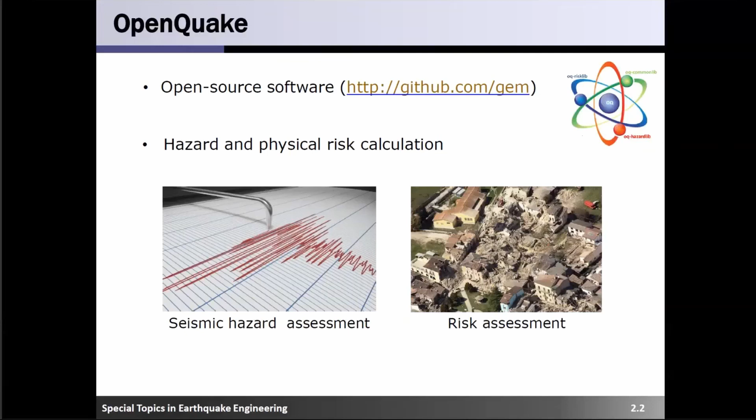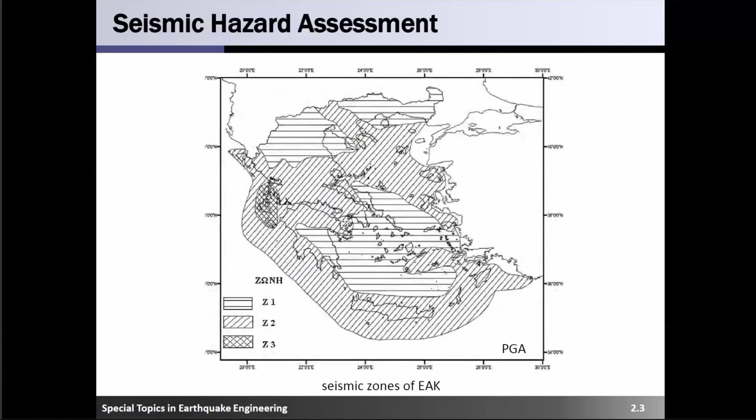Well, seismic hazard assessment does the same for us, but a little better, I think. Those are the outputs we expect from our analysis. When we perform a seismic hazard assessment, the output may be a seismic hazard map. On a map like this, at every point, we can know the value, the ground motion parameter that we want.

In this case, this is a map that shows peak ground acceleration at every point with a specific probability of exceedance in a given time span. For example, we have here peak ground acceleration with 10% probability of exceedance in 50 years.

The next thing we can have, if we don't want a map, is some hazard spectra. A hazard spectrum gives us the spectral acceleration values for a range of periods given a constant probability of exceedance. With the red color, we can see the uniform hazard spectrum we produced from OpenQuake, and the other two spectra are from Eurocode. We know that the black one is for zone 1 and the blue one is for zone 2.

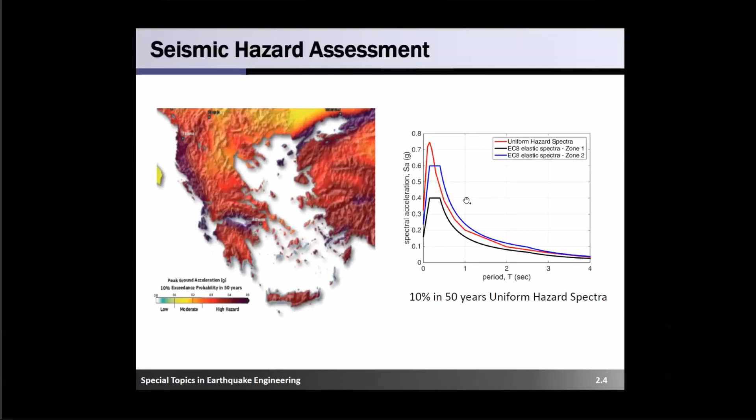You know what spectra is, you have used them, but you can see that those results are not exactly like Eurocodes. That's why we prefer them, in order to have not better results, but more precise, I would say.

When we want to design a structure, we need a finite element model. Now that we want to assess the seismic hazard on a region, don't we want something like that? Of course we do. We need a model that gives us all the details for the seismic sources we will have in the area that we will study.

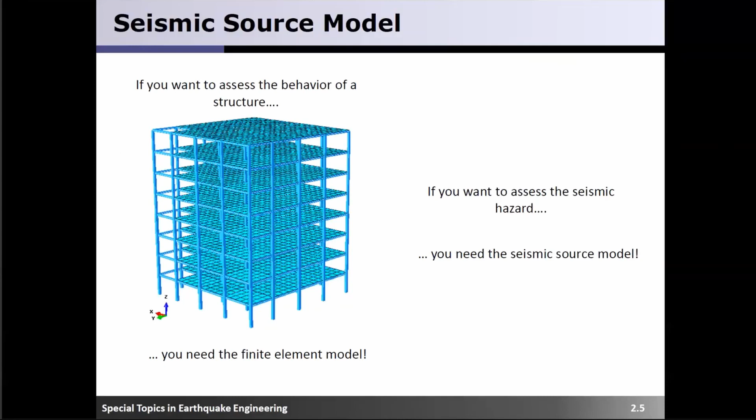In order to simulate the seismicity, we use the seismic source model. We have two options. First, the easiest one is to use seismicity on faults, but this is not easy since not all faults are known. We don't know all the details for all the faults that exist. In this case, if we do know, we can use this option and say that an earthquake is produced by a well-defined fault and a well-defined rupture.

I'm stopping here. Am I too fast? Do you follow me? Do you have any questions? We're following, it's fine. Yes, we follow. Thank you.

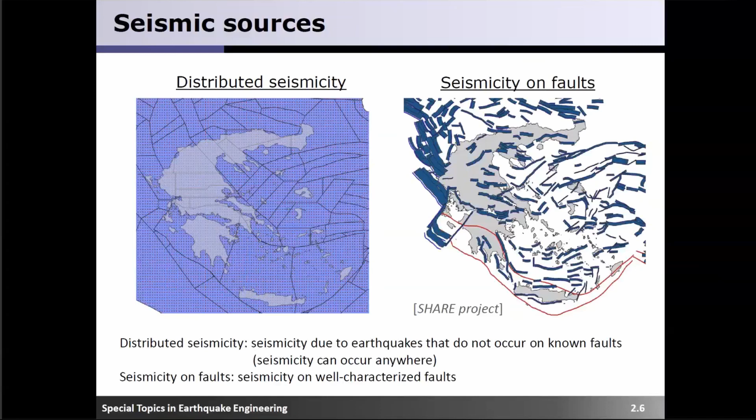As we said, if we don't have a specific fault, we have another option. In this case, we use distributed seismicity. In distributed seismicity, we say that earthquakes can happen everywhere, anywhere, here, there, with the same probability of exceedance. We don't know where, but we know that every point has the same probability of exceedance. So if we choose this kind of seismicity, we can perform the analysis.

We have three options. The first option in this category is to use a point source. A point source considers that the rupture — here we don't have faults, we have ruptures where earthquakes are produced — is generated under a single point that we can see. It is simulated by a planar surface representing the rupture.

Of course, we can also use a grid source, which is a collection of point sources. We won't have only one point source, we can have more. There is a final option where we consider that at every point a rupture may happen. From a computation point of view, those two options — area and grid sources — are the same, because we have to provide OpenQuake a list of point sources where the rupture will be.

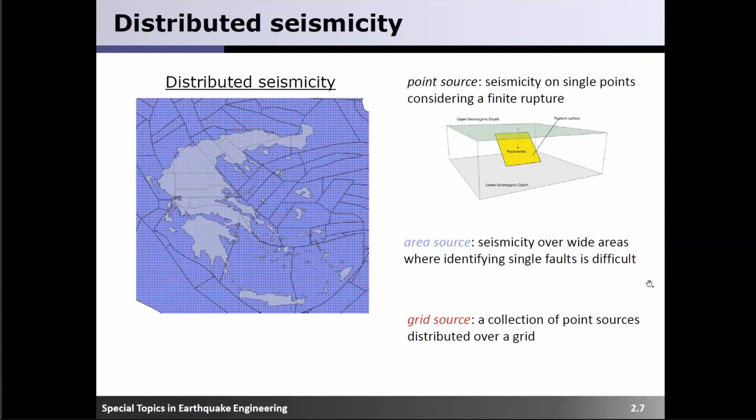Now let's move on to seismicity on faults. We said that here we have a specific fault. How can we simulate it? First, we can use a simple fault. A simple fault is generated by the projection of the fault trace over depth. The fault trace is the intersection between the fault and the surface of the Earth.

It is simple — just a line, or a polyline I would say, that we project over depth. This is what we will use today in one of the examples in OpenQuake. Of course, we can use a more complex fault. In this case, we have a surface that changes width and inclination, values that are not constant. Finally, we have a third option where the fault is simulated by a set of planar surfaces, and this represents the whole fault.

Do you have any questions? Something that you don't understand that you would like to ask? I'm not sure I understood the difference between a simple fault and a complex fault.

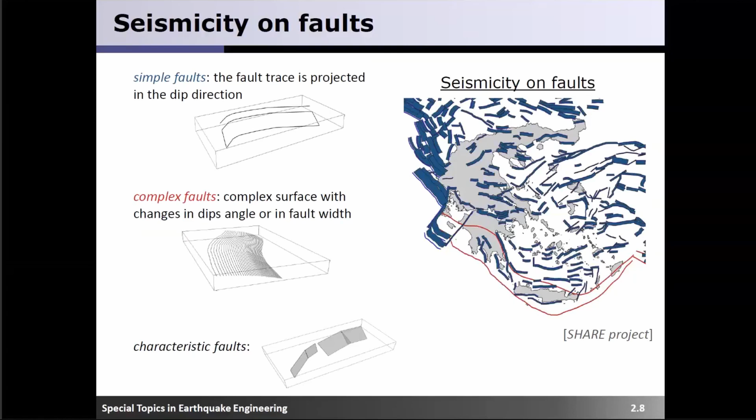Here we will see how we can simulate a point source. A point source is used for distributed seismicity, remember that. So we have a rupture, and our rupture is a rectangular surface.

For that, we have to specify the inclination, exactly what Mr. Vamvatsikos told us. So I have the inclination of the rupture plane, and I also have the orientation of the fault. The inclination is the angle between a horizontal plane and my rupture. We can see some examples here, a 0-degree angle, a 90-degree angle, and many more.

Finally, we have to specify the depth of the hypocenter. We said that this is a source where it is generated under a single point, and that point is the hypocenter.

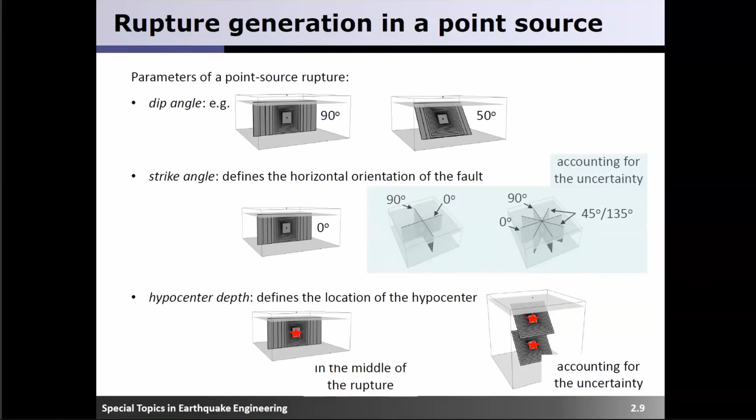So I have an area distributed source in this case, and we said that earthquakes can occur anywhere with equal probability. We saw what the point source is on the previous slide, and we also said that we have to give as an input a list of point sources where our area will be.

I have a question regarding the area source. You mentioned that the earthquake could happen anywhere in the area. So for the area source, do we assume that all the earthquakes that could occur would be point sources, or is there the potential that there would be like a simple fault, like an earthquake with a fault also? So the question is, if we have an area source, could an earthquake on a simple fault happen there? Can we have both cases, a simple fault and a grid source?

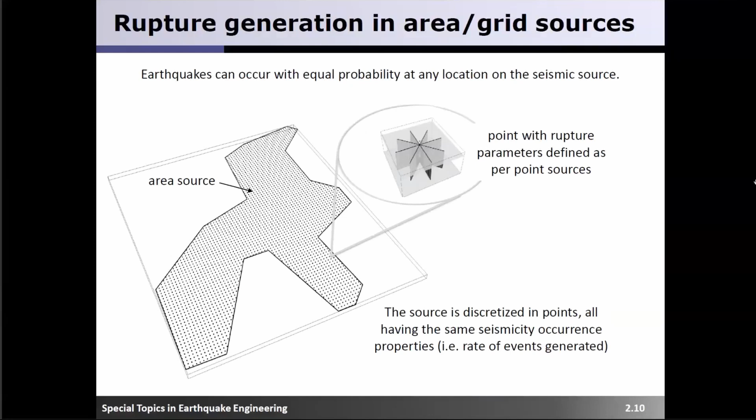Okay, let's move on. I think we stopped over here. Now that we have specified our seismic source model, we know what our sources are, but we don't know what the magnitudes of the earthquakes that will happen are.

Each seismic source is associated with a model that gives us the distribution of earthquake magnitudes. So for each source, even if this is a simple fault or an area source, at every point I know that I have a distribution for magnitudes. So for a given magnitude, I know the probability of occurrence. If I want to use a nice recurrence law, it's Gutenberg-Richter's. So I have a source, and for that source I have a distribution that shows me, for each magnitude, the probability of occurrence. Okay, so far? This is not something difficult.

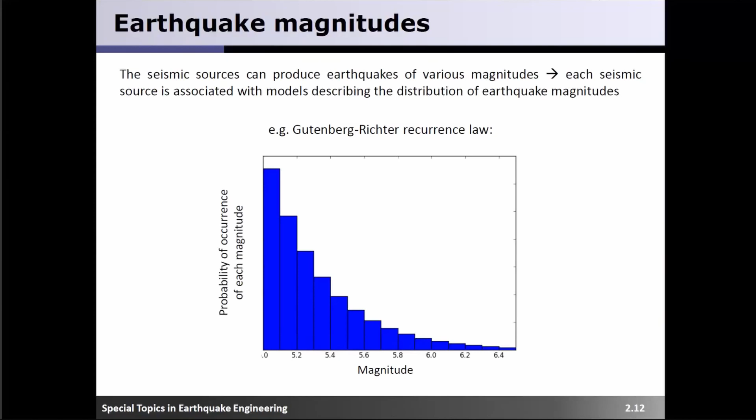Of course, even if this source is a simple fault or a point source, its rupture is associated with the earthquake magnitude. The higher the area of the rupture, the higher the magnitude of the earthquake. You understand that? If this is a bigger rupture of the fault, this will be more devastating.

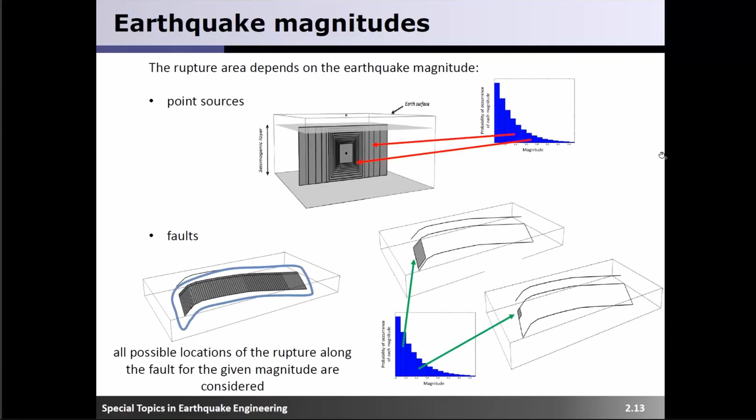Okay. Let's see something else. We said that we have our sources. Are we 100% sure that we have only one type of sources? No, we are not. If we want to consider all the cases for our seismic sources, we have to use a logic tree. This tree is something like that—it helps us consider all the epistemic uncertainties of our model.

So I have a simple fault. Does this fault have a specified dip angle of 50 degrees? Sometimes I'm not sure about that. So I will use a logic tree in order to take into account all these cases.

Do I have only a single seismic source? Even if I do have a single seismic source, and this could be a single fault, does this fault have a specified dip angle, or is the hypocenter exactly one point with specified coordinates? All those uncertainties are concentrated on a logic tree and help me take them into account. Any questions for that?

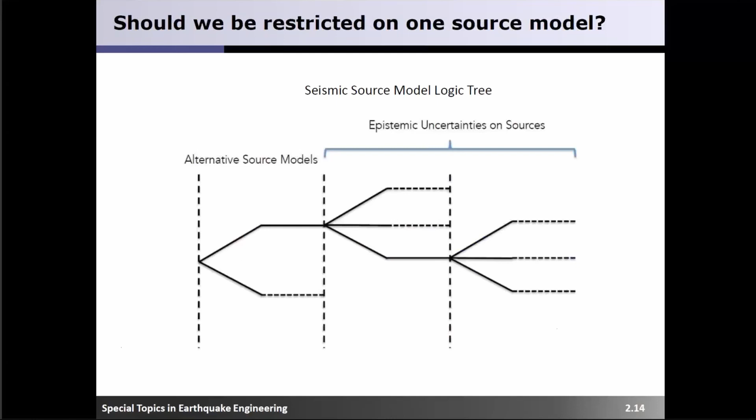So now that I know my seismic sources, I know where they are. If I have a site that I want to predict the future shaking, and I know the sources in that site, I know the distances between my rupture and the site that I want to study. Also, we know that each seismic source is associated with a distribution that gives me the magnitudes. So I have the magnitude and the distance.

We are engineers, and when we want to design a structure, we don't use values like the magnitude and the distance directly. We want parameters that are associated with the ground motion. That's exactly what a ground motion prediction equation does. We give it as inputs some characteristics of the earthquake, like its magnitude and the distance from our site, and it gives us a ground motion parameter. Cornell's equation can give us back the natural logarithm of that ground motion parameter.

In this case, this is PGA. So I have as inputs the magnitude and the distance, and the output is a ground motion parameter. But this is the mean value of that parameter. So I have an earthquake, let's say with magnitude 5. This graph is for magnitude 5 earthquakes. And at a distance of 10 kilometers, using Cornell's equation, I find that the ln PGA has that value.

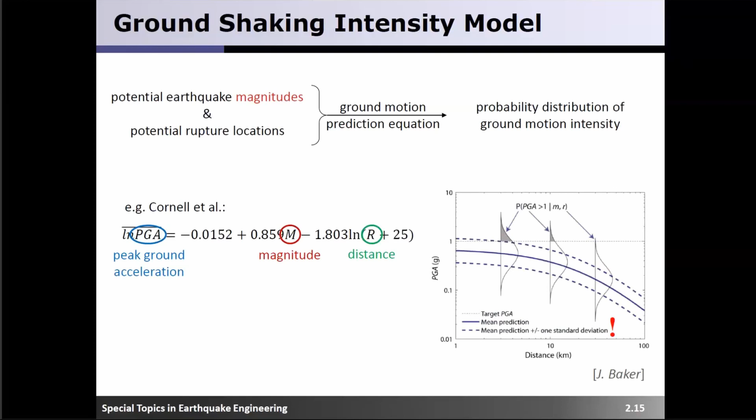So far we used logic trees only to take into consideration the epistemic uncertainties of our seismic source model. We can also use logic trees to take into account all the possible ground motion prediction equations. Is it okay to use only one ground motion equation? We're not sure. We may want to use two, three, or more. That's why we use a logic tree.

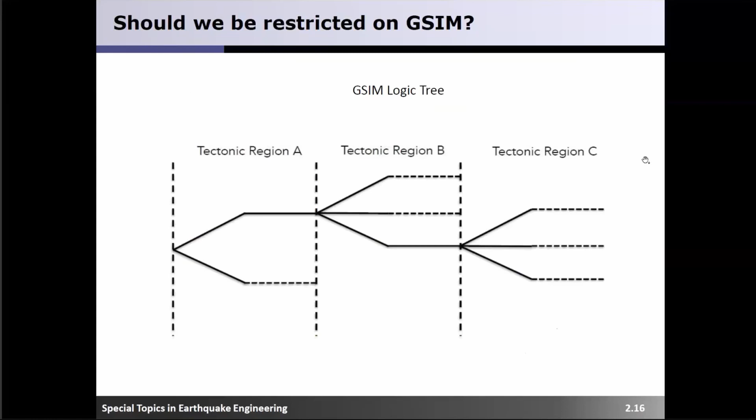Here's an example. We have our seismic source—this is a logic tree, we'll use that too. We have a seismic source, and we consider this is a fault. We're not sure about the dip angle, so we'll perform the analysis considering three possible dip angles.

For each angle, we'll also use two ground motion prediction equations. Each branch—those are called branches—is associated with a weight factor, so whatever I use is associated with a weight factor in order to produce my final output. I think this is the last one.

Do you have any questions here? Guys, let me come back a little bit and give you some pointers to understand what's going on. It's all about correctly assembling the pieces, the discrete pieces, going to the end.

There are two pieces you need to assemble. One is the individual moments, magnitudes, distances, epsilons—remember the faults. But there's also the part where you need to account for epistemic uncertainty, which is having alternative ideas about what the fault might be, or what the maximum magnitude produced by the fault will be, etc. Of course you could make this very elaborate, but usually what you do is discretize it.

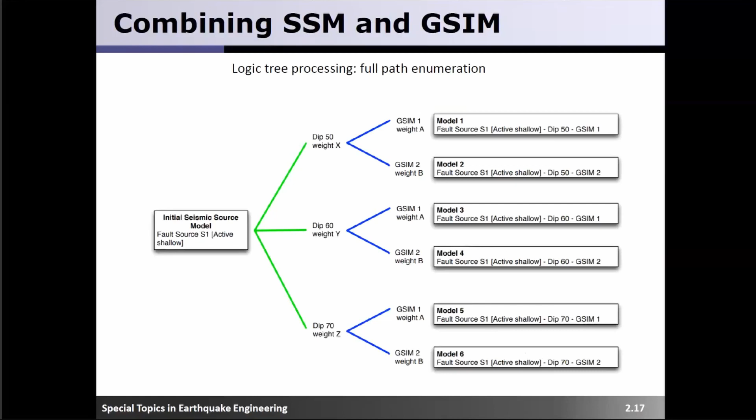Well, actually—don't worry, we've talked about all the previous stuff because they are our input for the analysis. We will use OpenQuake, which is our little black box.

We have to specify the source, the ground motion prediction equations, the logic tree, all of them, and a configuration file where we specify the parameters of the analysis we want to run, and then we get our results back. This is exactly what we will do now.

We will see an example of how to run a seismic scenario—sorry, we will perform a scenario-based seismic hazard analysis.

Let me open another PDF file to see how we can do that. Give me a second. Do you see my screen? Yes, okay. Let's see what we can do.

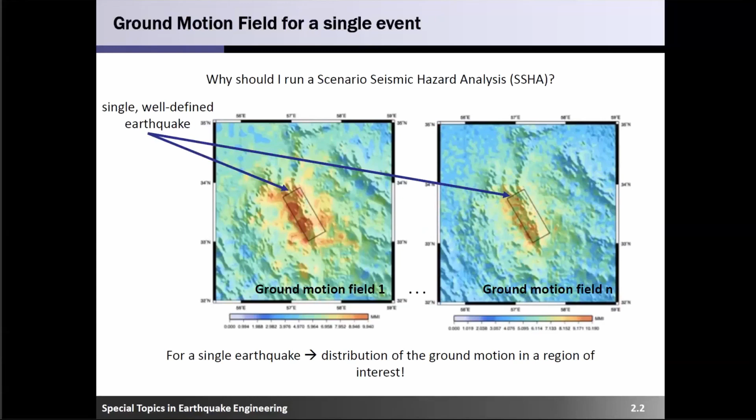Why do we need a number and not just one? Well, we have many uncertainties that we take into account. Can we be sure that the output is only one? There is no uncertainty on the outputs? Of course there are - that's why we need many realizations for the output.

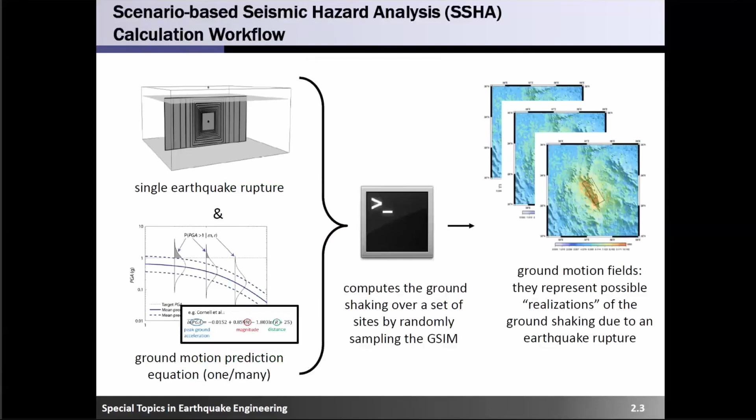Okay, now we can see how we can run an example on OpenQuake. The first thing we have is our seismic fault. We will specify its characteristics in a rupture model.xml file. We will have a folder with a rupture model.xml file and some other files that we need in order to run our analysis with OpenQuake.

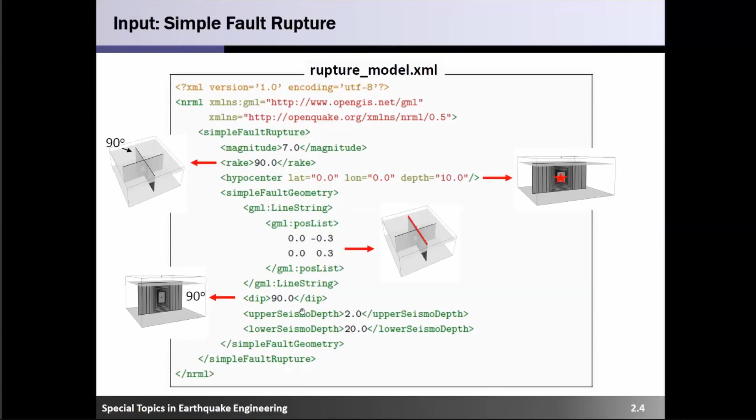Right here, we specify the characteristics of our rupture. We have a simple fault. We will make some changes to it - you don't have to rewrite it, we will give it to you and we will make the changes there.

We have a simple fault rupture. This has a well-defined rupture, and we know that it produces earthquakes with only magnitude 7. So, a simple fault with a well-defined rupture that produces earthquakes of magnitude 7.

As we said, when we have a simple fault, we have to specify its orientation. The orientation here is 90 degrees. We know also that it's generated under a single point where our hypocenter is. The next thing we have to do is specify the coordinates of that point - so orientation, coordinates for the hypocenter, and here we specify the inclination.

Also, we have to specify the coordinates of our fault trace. You see, this is the fault trace and this is the projection of our fault - of the fault trace, this is our fault. So I need the magnitude, the orientation, the coordinates of the hypocenter, the geometry of the fault trace, and the inclination. Actually, we have also two other parameters: the upper seismogenic depth and the lower.

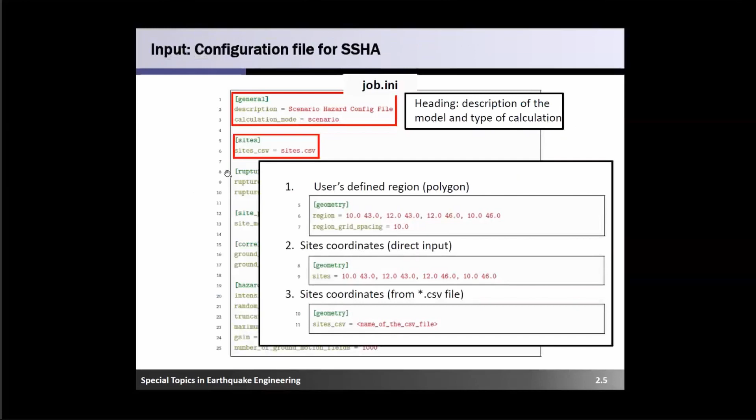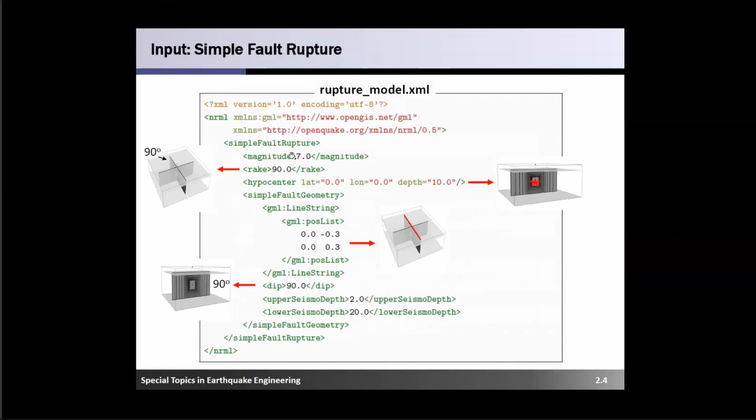We specify the site we want to study. The next thing is to specify the rupture. We have a simple fault with a really well-defined rupture. In order to specify those characteristics, we have used this file, where we set all the characteristics of the fault and the rupture, and we tell OpenQuake, here is my file where I have set all the characteristics, and you can find the details in that file. When we specify a file with some parameters, it must always be in the folder of the analysis we will use. We will see it later, but please remember that.

So I have specified the site or region that I want. In the case of a region, I have also specified a grid spacing that helps OpenQuake run the analysis. The next thing I have to do is give a mesh spacing also for the rupture. If you remember a few slides back, we have to give the mesh spacing for our fault also. This is used to help OpenQuake specify the distances between the points of our source.

And actually now we will see the parameters. Do you see here is the VS30 value that we will use? But before I go there, we have a site that we want to study. In that site, we have a simple fault.

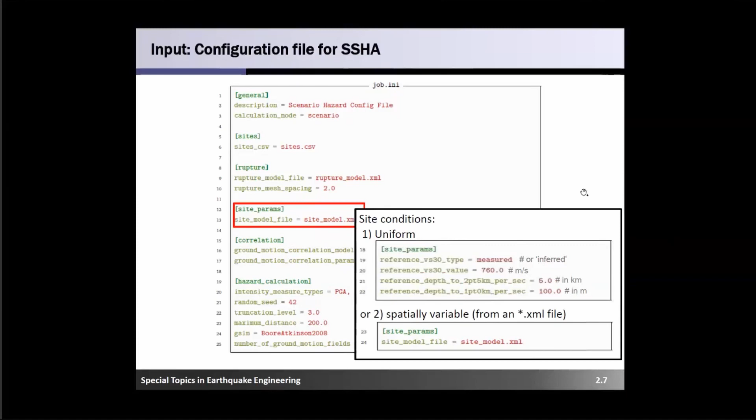Let's move on. Another thing we have to do: sometimes we can use those commands referring to a spatial correlation model. A spatial correlation model, well, when I have a point that is correlated with its nearby objects, I'm saying that I have a spatial correlation model.

If here the PGA value has a specific, well, let me restate it because I think this is kind of confusing. I have a spatial correlation model. That means every point is associated with its nearby points. They're not independent.

Sorry, can I come in here a bit, Angeliki? Guys, what you see here is actually a beautiful thing that needs to come in when you're not looking at specific points. Let's say you're looking at a lifeline, or an entire city, and a specific scenario happens. Now, if you just use the GMPE and sample randomly the epsilon values, this means that on average, the average structure will follow what magnitude and distance tell it to do. But locally, you will start seeing weird, hairy spikes because of this random selection at every grid point, different sites all over the city, all over your island, for example, every 100 meters.

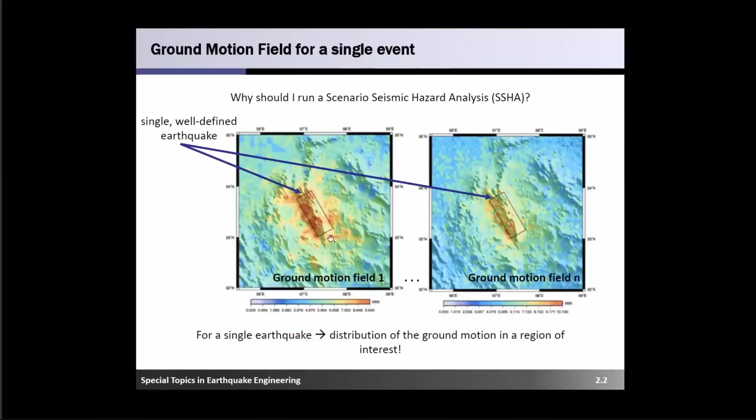The next thing we have to specify is the truncation level. Well, before I go there, I have to set the maximum distance of the fault. This is used to reject all the possible far-field earthquakes that may happen - the largest distance between the rupture and the target calculation site.

So when I have a Rupture, this produces earthquakes, and the most far away point that I want to study is 200 kilometers away from it. I have to use, in order to produce the intensity measure types, a ground motion prediction equation. In this case, we will use the Boore-Atkinson 2008 ground motion equation.

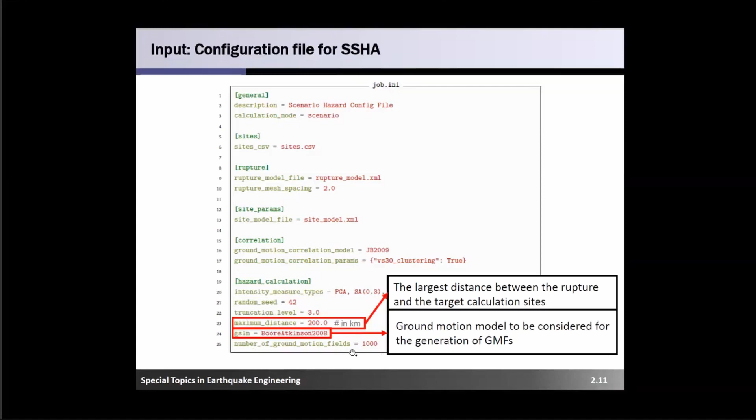Of course, we have to set the number of ground motion fields that we will use. Those can be as many as we want. One is not a good option. 2, 3, 10, 1,000, as much as we want.

Let's go back to the truncation level. The truncation level is, as we discussed earlier, the number of standard deviations around the mean value. As explained earlier, we have this line that connects the mean values of the intensity measure type we want to study, and around it we use mean values plus or minus a number of standard deviations.

In this case, where we have set truncation level equal to 3, that means we want the area that expands from the mean value minus 3 standard deviations until the area of mean plus 3 standard deviations. So I have bounds from minus 3 standard deviations until plus 3 standard deviations. In this case, I will use all the values that are the 99.7% of the values that have been produced.

This is from your statistics class.

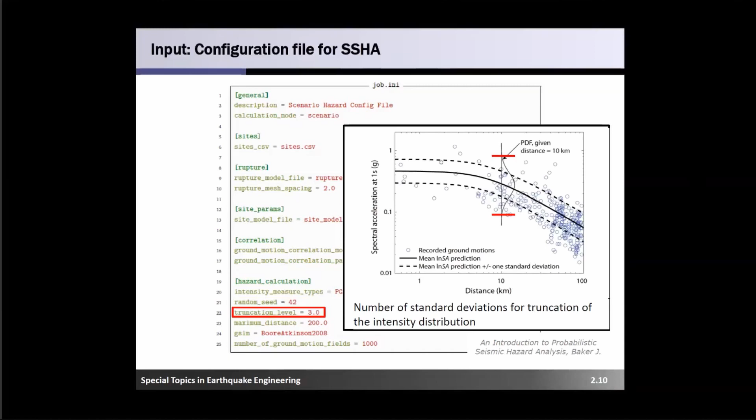Guys, sorry Angeliki, yes, I'll be taking off in a bit. It's about time, whenever you're finished with this slide, I'd say you take a break. Okay, I think this is the final one, so we can have a break, and after this break we will run our OpenQuake files and produce our own ground motion fields.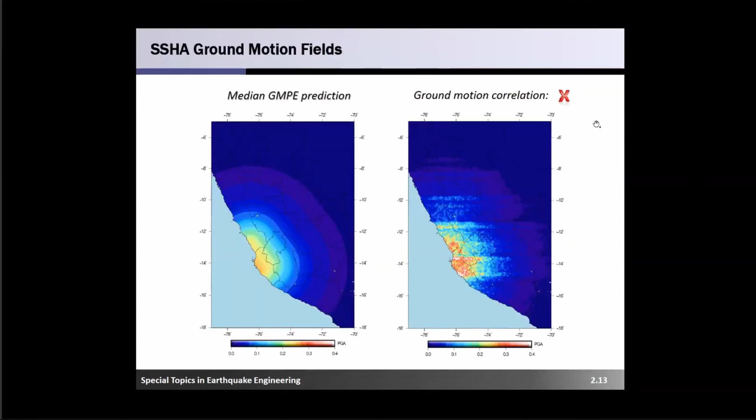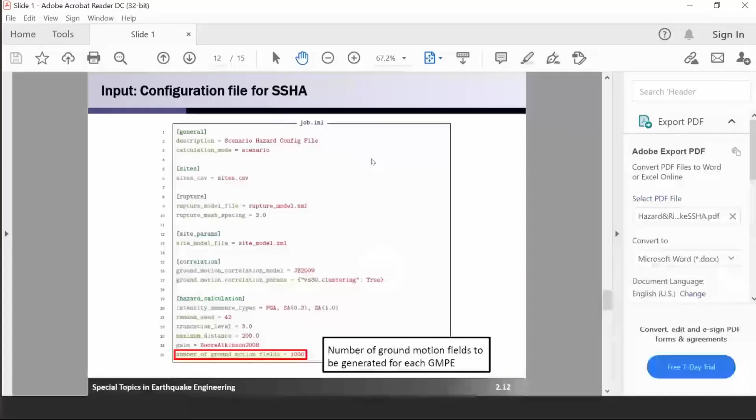Just to let you know, this discussion of truncation is really, really important, because if you go to real seismologists and talk to them - we are surrogate seismologists here, more structural engineers - if you talk to real seismologists, they'll tell you how much that plus bound, the plus 3 standard deviations, pretty much tells you the upper bound of what can happen at your site. It shuts down what can happen at the top. So it's really important, because it tells you, on average, we've observed this much, plus 3 standard deviations. That's a lot. That can be a lot.

There's been a lot of calls and discussions about how you figure that out. Should you maybe use a different distribution? But then again, this is a discussion of how PSHA is going to be running in the future. For now, it's a log-normal distribution with a cutoff of plus minus 3.

Okay, that's all. Okay guys, ciao Angeliki. Please hold the fort, any questions? We also take emails, Akrivi will also be around to help. Ciao from me, goodbye Mr. Rambatskis. So we can have a small break, and after that we can run our examples, our demos for OpenQuake. So you're free for a few minutes.

Okay, I think it's time to continue after the short break. Let me share my screen.

Right now, we will run a demo in order to obtain 10 ground motion fields for PGA and spectral acceleration at 1 second period. How can we do that? I'm sure all of you have installed OpenQuake and QGIS on your computers.

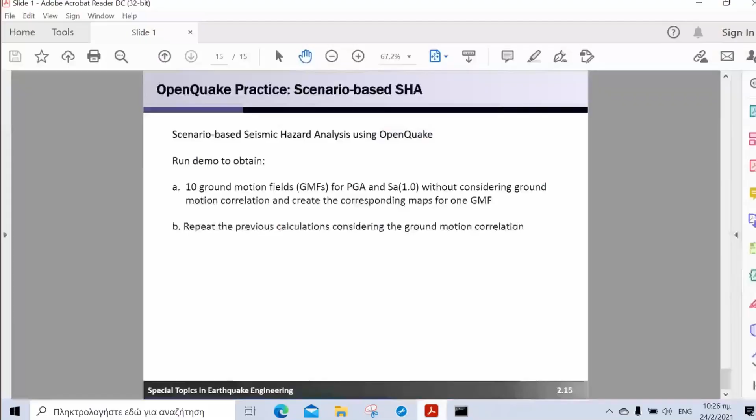Are we all okay with that? Has this window opened on your browsers? Some said it came as an empty page, showing a list of calculations from the desktop. Oh yes, this is something else, because I have run many calculations in the past, that's why I have those here. For you, since it's the first time you run OpenQuake, this must be empty. Don't worry about it.

Also, one thing you have to see here is that some of my analyses, excuse me for a minute to drink some water. Okay, better now. You see those analyses are green - that means the analysis has been completed. When you see a red color, that means something was wrong.

So let's run our first calculation. In order to do that, click on Run a Calculation, and then find where you have stored the file we just made. Click on it, and the analysis will run. If you check status, it says created. Now we will wait until our analysis is done. Is there any problem so far?

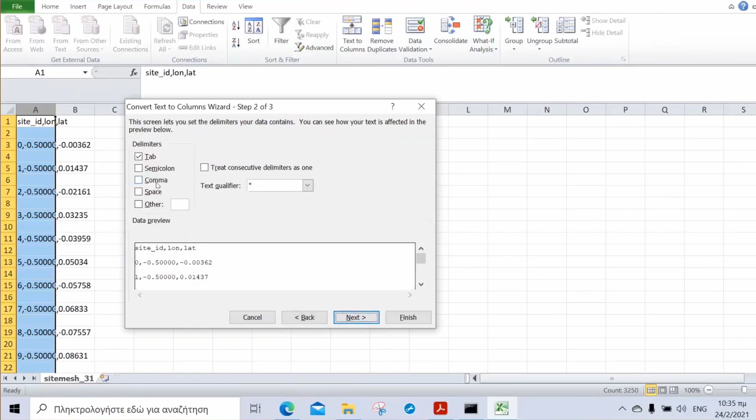Because this is a CSV file, a comma separated file, we have to use the option comma, next - and this is a problem. If you are using a comma on your Excel as a delimiter, you have to click on the Advanced option and change the comma with a dot.

Something that I'm doing because my Excel uses comma and not a dot, so I'm changing it - I'm showing it for the second time. If you don't have that problem, you don't have to do that. And I'm pressing Finish. Now you see that I have all the results in a format that my Excel understands.

Is it okay so far? Do you understand it? Do you have any problem? This is not something difficult.

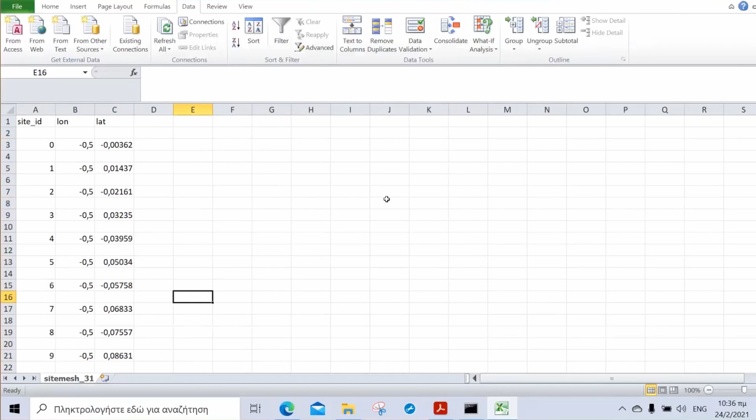So in this file, called site mesh, on your outputs this value won't be 31 - this must probably be 1. This is the first analysis you ran. So here we have the outputs for the site mesh.

The next thing that is important for us now are the ground motion fields, ground motion values. So if you open this file now and make exactly the same change we did before, what is it?

What is this? I'm clicking on the first column, use the option Text to Columns on the Data tab, click Next, use comma as a delimiter, Next, use the Advanced option because my Excel is stupid - change dot with a comma, press OK and Finish.

Okay, well what do we see here? First of all, on the event ID we see the number 0. If you scroll down you will see that it goes until 9. We have events from 0 to 9: 0, 1, 2, 3, etc.

This is the ground motion fields we want. We asked for 10 ground motion fields from OpenQuake, and this is what we have. Because it's written in Python, the first number is not the unit, it's 0. So I don't have 1, 2, 3, 4 until 10 - I have 0, 1, 2, 3 until 9. I have 10 ground motion fields.

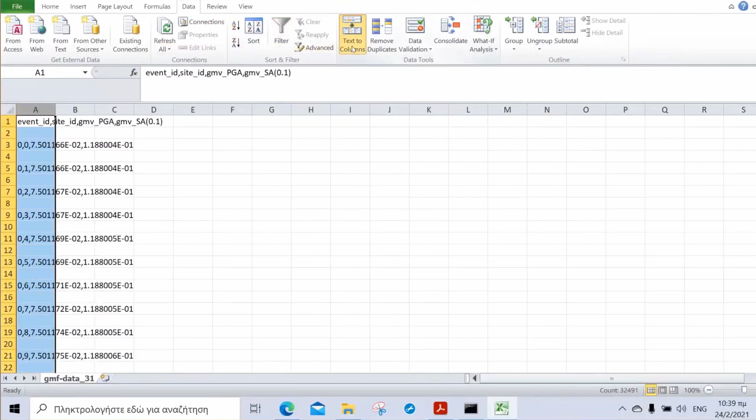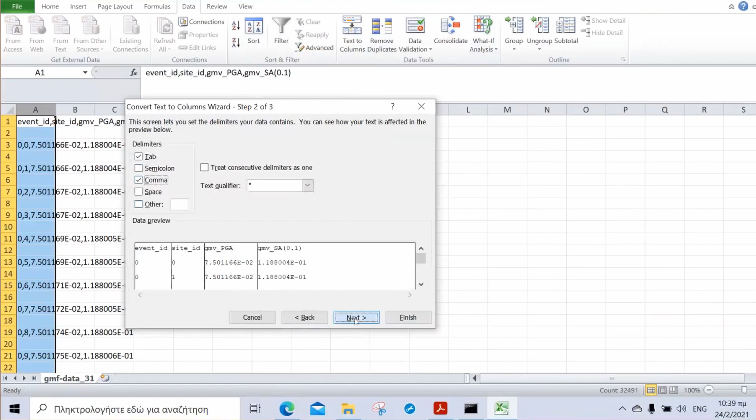Have you done it so far? Yes, okay, I'm clicking Next. On the delimiters, I use the option comma, and Next. I don't know if your Excel uses comma or a dot. Okay, thank you, yeah, okay, that's fine.

Okay perfect, I have to change it again.

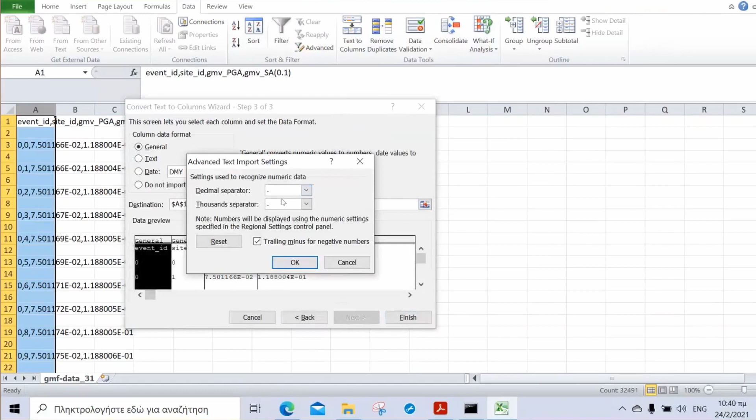Clicking OK and finish. And this is how I do it.

Any questions so far? Something that you don't understand, or anything else?

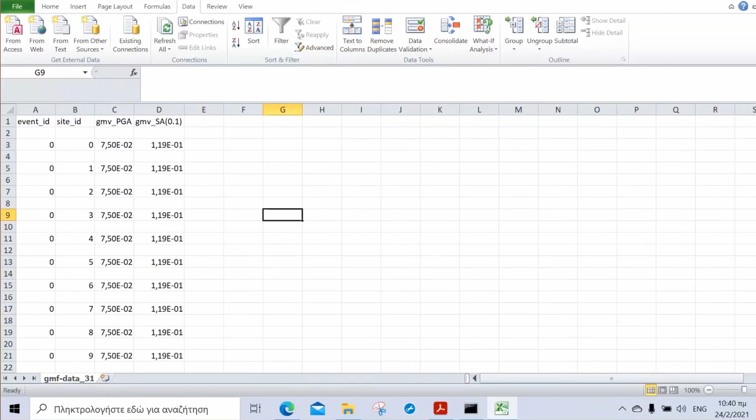I'm clicking, I won't save it. But now what I want you to do is open QGIS. If you have downloaded QGIS, you will see there are many options. The main option we will use is the desktop option, without any other comments. Click on it and we have to wait a few minutes until it opens.

Seriously, if you have any question please ask me, if you don't understand something. Okay, it takes some time to open. And we will start a new project. Have you done it? Yes, okay.

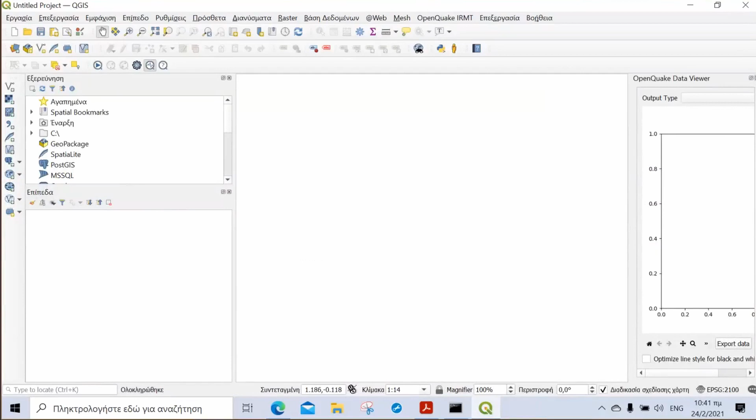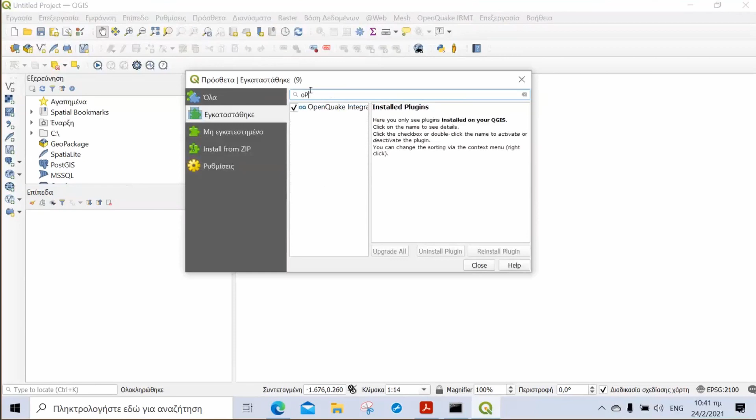Okay, so we can continue. The first time you run QGIS, you have to enable the plugins for OpenQuake — I think you already have installed them. If you haven't, click on plugins, and on the search button, search OpenQuake. I have already installed it, but if you don't, please install the plugin. I'm sure all of you have done it; I don't believe there is any problem.

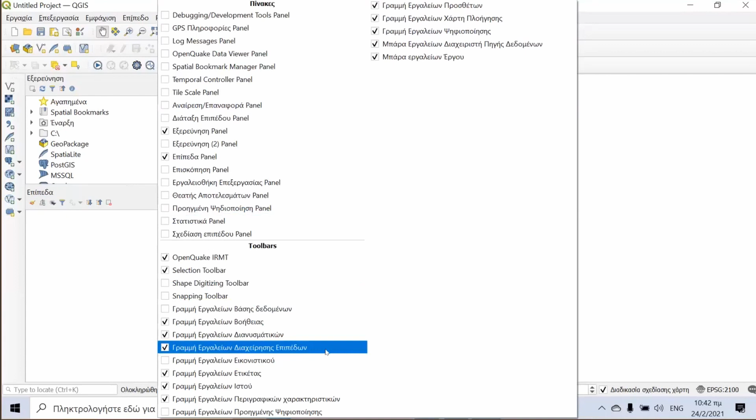The first time you run QGIS, please right-click on it and this window will open. I want you to click on manage. You have to click on manage layers toolbar. I have already clicked on it, so I will do it again so you can see that.

Click on it, and those tools are here in order to use them. Okay, this was easy. Does anyone have a problem?

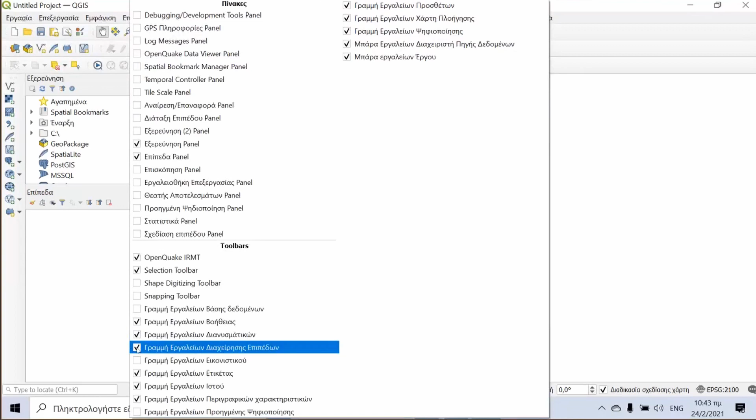Can you show it again? Of course. Right-click on QGIS — probably if you do it here it won't be shown, do it here. Click on manage layers toolbar. This is the option; I unclicked it and I will do it again. Are you okay? Okay, thank you. You're welcome.

What we have to do now is add a layer. Whenever we want to do that, we have to use this option — I don't know how it's called in English right now, but remember we will use this icon that looks like a comma. Click on it and this window opens.

Here on the dots, we will search for the layer we want to see. Let's find the files we have downloaded so far. Let me find the file I want. Where is the file I want?

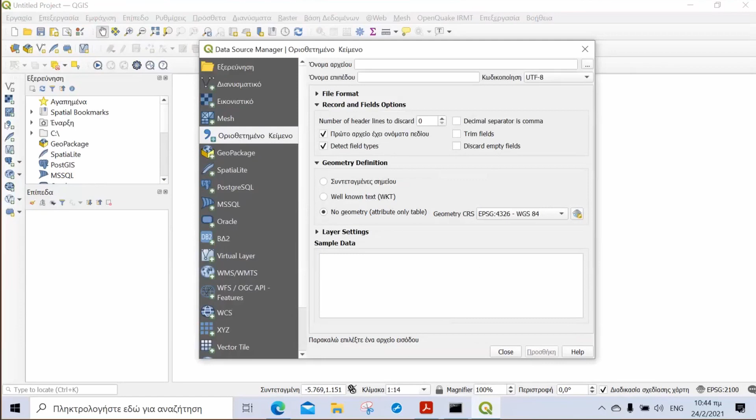Do you remember the outputs file? The first thing I want to do is see the site mesh of the region I want. Click on site mesh — let's do it again. Use this icon, it looks like a comma. Click on it, click on search here, and find the file we installed from OpenQuake. Click on site mesh.

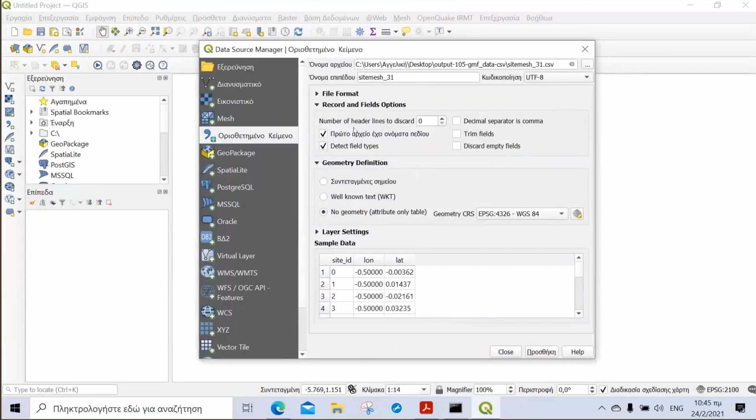And we have to make some changes over here. The first thing you have to do is use the file format as a CSV file. That way, down here, you can see you have all your columns separated. Next, you have to click on those two options. The names of the columns will be site ID, longitude, and latitude, and we want QGIS to detect the field types.

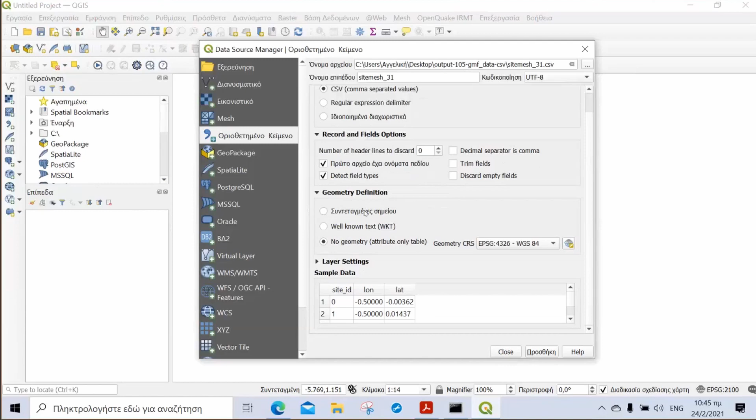The next thing we have to do is define the geometry. You see that here we have a site ID and the coordinates, longitude and latitude. That's why on the geometry definitions we have to use the first option. If you click on it, you have to specify that X is longitude and Y is latitude. Have you all done that so far?

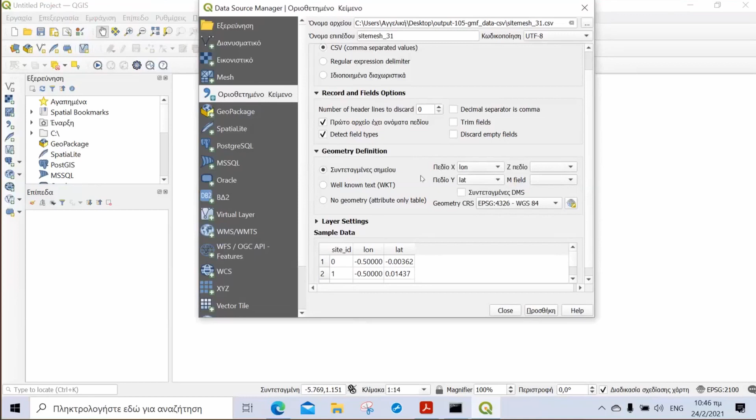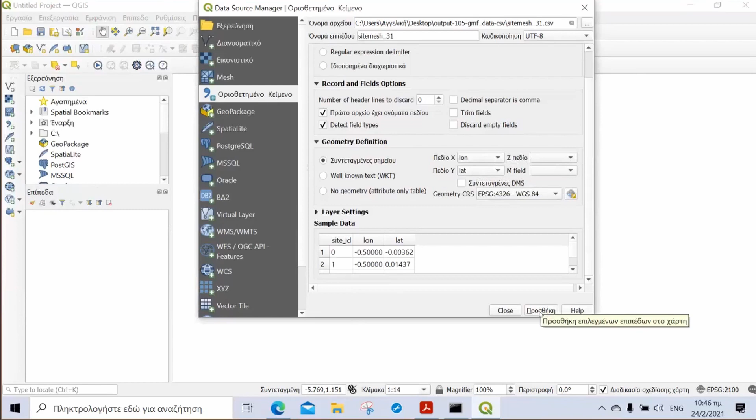It is easy. We want a layer that shows us the grid of the region we want to study. We have to use a comma separated file to find the file — we need site mesh, it is a comma separated file. We have to click on those options; it is something QGIS needs in order to understand the type we have set. We have to set the geometry definition on coordinates, specifying longitude and latitude. If you have done it, we will click on add, and see — this is the site mesh of the region we want, a square region.

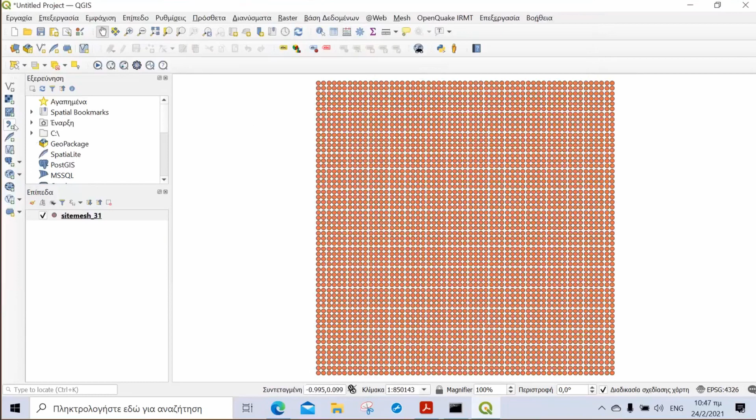Okay, and now we want also to see the ground motion fields. In order to do that, we have to also click on the comma icon. And now we will give as input the ground motion field data file. Click on it.

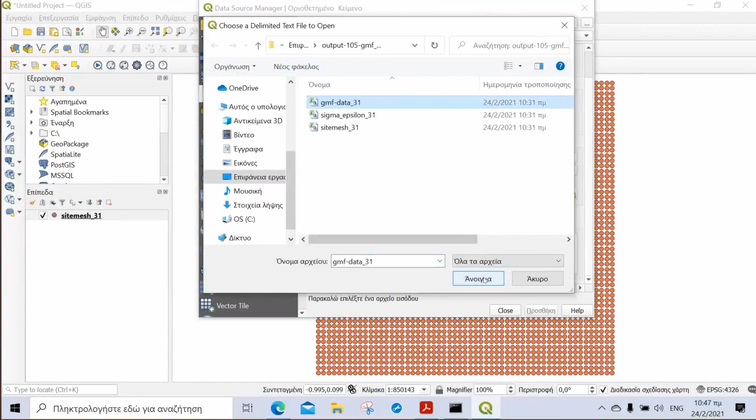And now we have to make some other changes. This is also a comma separated file — don't worry about those commands, but in this case, if you see, we have the events ID, the site ID, and intensity measure types. There is nowhere geometry coordinates, that's why we have to use the no geometry option.

Okay? Have you all done that? Is there any problem so far?

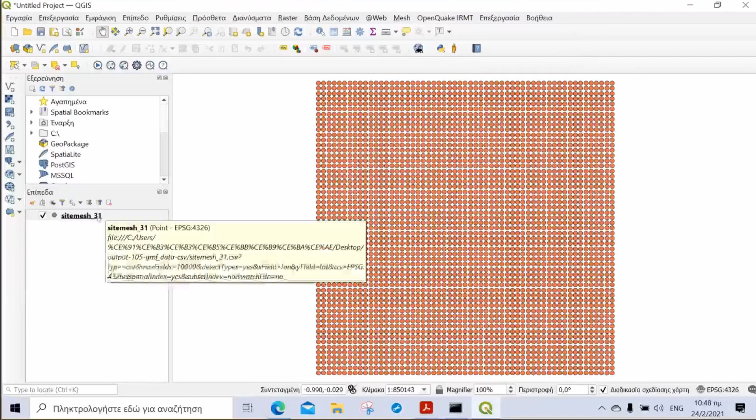I have a problem with the previous step. I cannot get the addition to work, something isn't going right. Okay, let me remove that - right click on it and remove layer. We will do it again.

So click on the comma icon. Have you done it so far? Can you start with even before that, if you don't mind? Like how to get those, the comma thing on Excel? No, okay, like the step before. You mean to have those icons? Yes. Okay, sorry, don't worry.

You can also do that from those options, but it is easier if you have them all here. So right click on it, right click on QGIS. Is this showing on your computer? No. Okay, just copy coordinates.

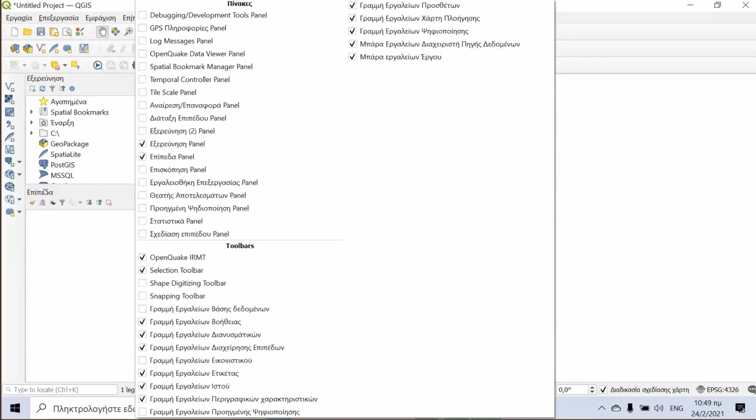That's what I have. Okay, you're doing it here. Yes, please try over here somewhere. Okay, possibly here that says layers, epipeda. So if you click here, somewhere here, I believe it will be shown. Yeah, sorry, yes, okay, yes.

Don't worry, so please enable this command, manage layers toolbar. It is 2, 3, 4, 5, 6, 7, 8 - I think it is the 8th option. Can you see it now? No, I don't see it. Manage layer toolbar. Yes, okay.

Yes, I have the comma now. Perfect. Okay, so let's do it again. You have to click on the comma icon. It is not actually a comma icon, I'm just telling it like that.

Click on the icon, and now you have to click on the dots over here. This is a search button. Find the file that you have downloaded, or that you have from your analysis if you're using the command line tool, and find the site mesh.

Click add, and the first thing for the site mesh is to click on comma - it is a comma separated file. You have to enable those two options on the record and field options. You have on the geometry definition to click on coordinates.

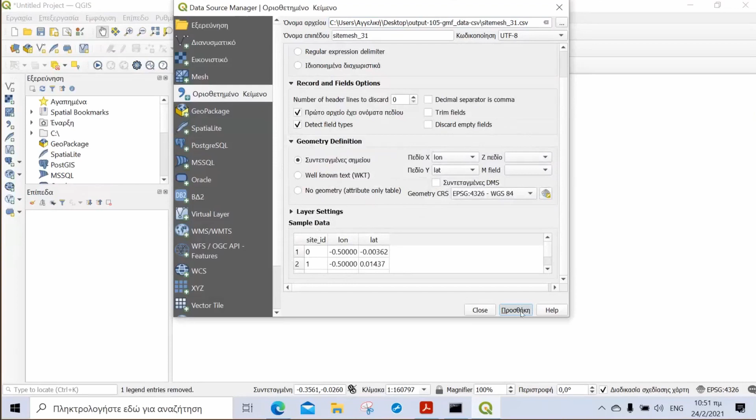It is longitude and latitude, and you will see something like that in here. If you click add, this must be shown. Do you all see that? I can see that, yeah.

Okay, that's perfect. The next thing we have done, or you can do now, is to click again on the comma icon and find the GMF data. Click on it - it is also a comma separated file.

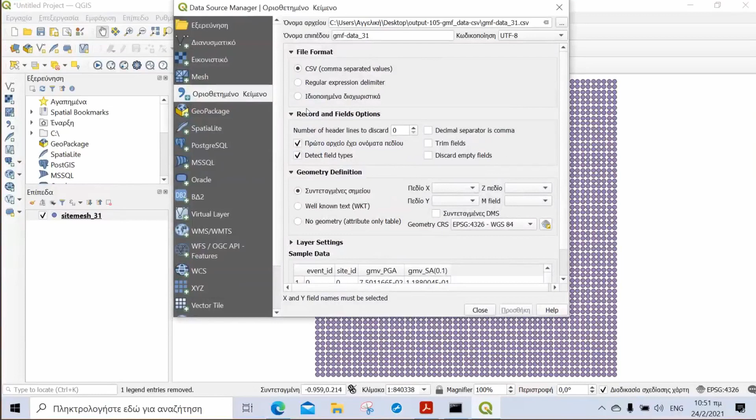We don't mess with those commands. And the other thing we have to do is to click on no geometry, because we don't have any geometry here - we will connect those IDs with this layer.

Click on add, and you see that nothing happens. Weird. No, actually it's not weird, because as I told you, we have to connect those layers. On the site mesh file, we have...

the IDs of each point. This is point 0, point 1, etc., and their coordinates. Here we have only, for each ground motion field, the intensity measure type and the site ID. That's why we have to click on site mesh.

Click on it, and now right click with your mouse and click on properties. Right click on site mesh and properties. Do that, and if you see over here, click on joins - synthesis in Greek. If you click on joins...

right here down on your screen, you see a cross. If you click on it, you see that we want to merge this layer, the ground motion field data, with the site ID.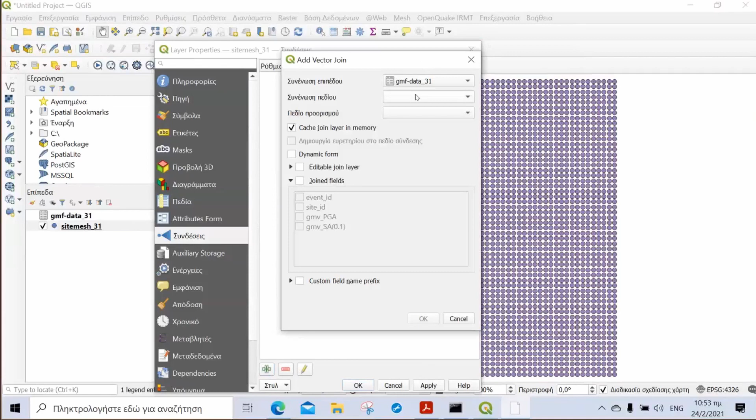So in order to do that again: right click on site mesh, click on joins, click over here, add new join, use the site ID options, and click OK, and apply.

Also nothing happens. Before we connect them, I want you to do something else. The first thing - you remember that we have asked OpenQuake for 10 ground motion fields. I want from those fields only the first one.

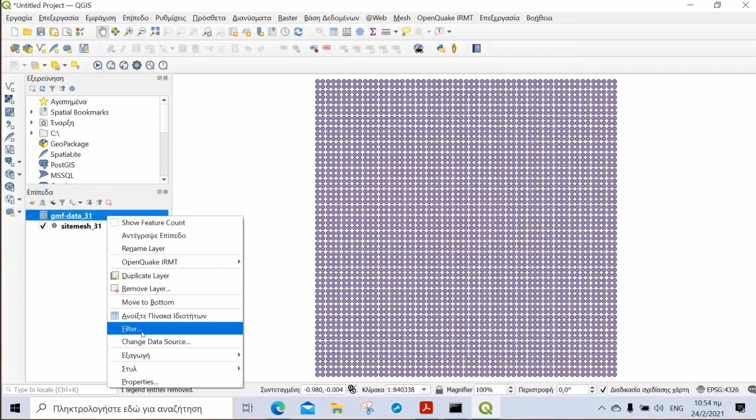In order to do that, right-click on ground motion field data, and there is an option that says filter. If you click on filter, this window opens.

Click on event ID. That way I can extract from the outputs only the first event ID, only the first ground motion field.

So right click on ground motion fields data, click the filter option, click here event ID, use equal, and you can use whatever ground motion field you want. I will use the first ground motion field - we said that the number is not 1, it's 0, but I could use 3, 4, 6, or whatever I want.

Right now, yes? Can I interrupt? On the fields, instead of just event ID, it shows me event ID with a question mark, site ID with a question mark, etc.

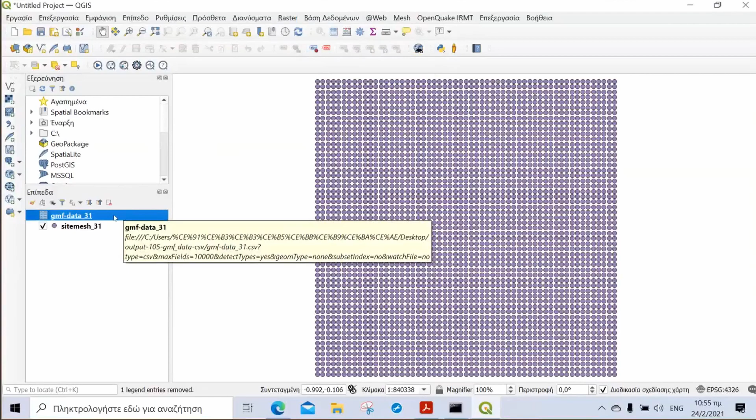Okay, I'm stopping sharing, and please share your screen in order to see what is going on. I'm using another computer, so... Okay, just now.

It is probably something on the commands we used on QGIS. So if you are not able to share your screen, I will continue, but if you can do it, please tell us. Right now we have filtered, actually I stopped it. I want the first event ID. I'm clicking on 0 and OK. If you filter it, you will see this icon here to be sure about it.

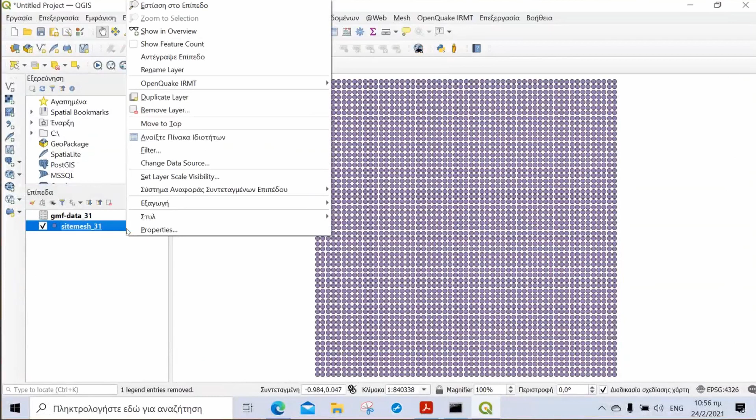What we have to do now is return on the site mesh, click on properties, and go on joins. If you have joined those two layers, this must be over here. If it isn't, you have to join those layers.

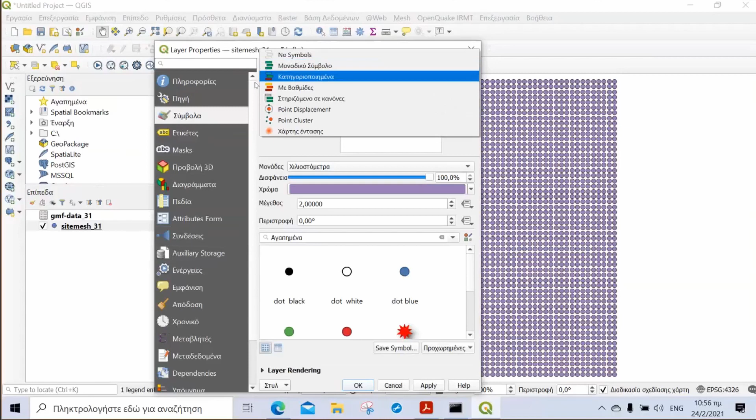Now we have to click on symbols. If you click here, you have to use this option, called με βαθμίδες, or in English, graduated. And now I have to use the parameter of the ground motion fields that I want to see. If you click here, you will see that there are many options.

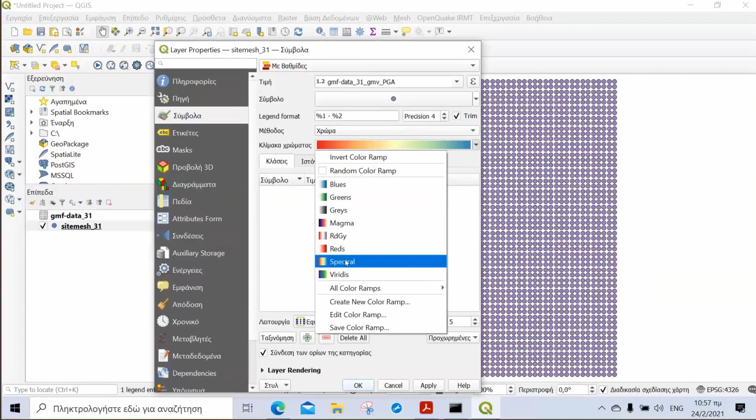What I want to do is see the peak ground acceleration. I have used peak ground acceleration, and on the colors ramp I'm using the spectral one. I clicked on spectral, and now I want to invert the color ramp. The lower values will have a blue color and the higher will have a red one.

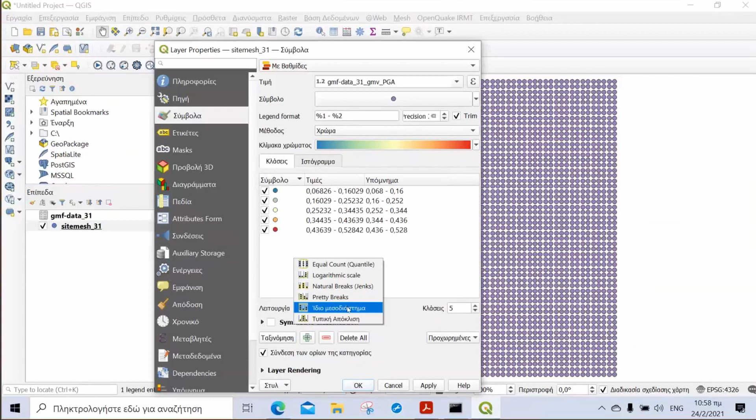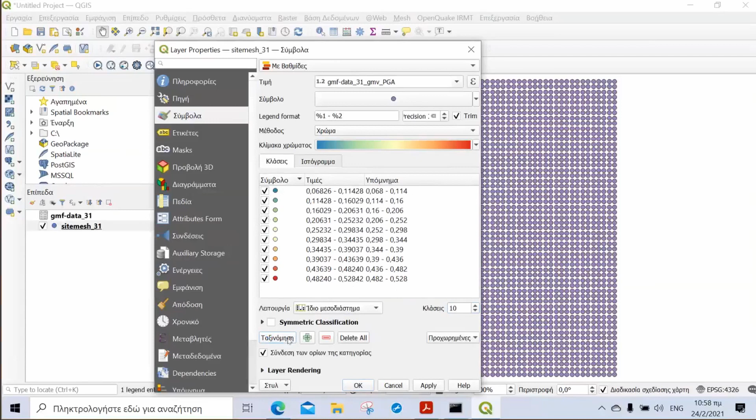Okay, we use that. Click here on ίδιο μεσοδιάστημα - probably this is equivalent on your computers if it's in English. Click on classify. Those results will be here. You have some classes, you can use as many as you want. This is the number of classes you will have. Let's use 10 classes, and click on apply. If you do that, you see we have our first ground motion field.

Okay. Probably you won't have a problem, but if you do, please guys tell me, because I really have to go. I have another seminar 5 minutes later. Do you have any questions?

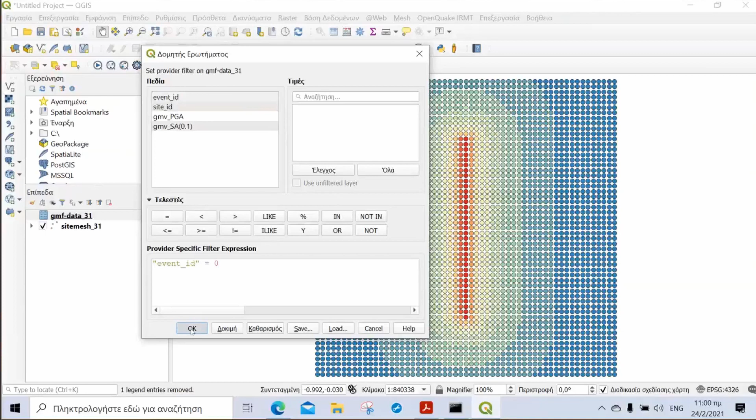Okay, we'll do it really fast. Click on event ID, use equal and press 0. Okay, now it's not filtered on mine. Okay, event ID equal to 0. Click OK, now it is filtered, I can see it.

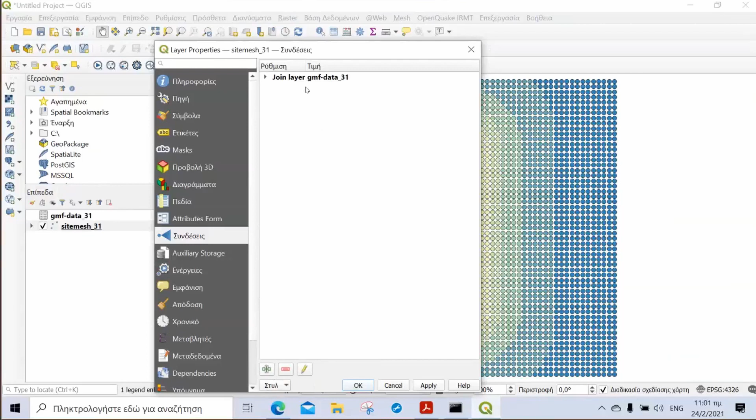The next thing you have to do is right-click on sitemesh, click on properties. Have you joined the layers? If you haven't, click on joins, then click on add new join. ID on both of them, am I correct?

Okay, next click on symbols, then click on graduated, or με βαθμίδες in Greek. Next, you have to click on the intensity measure type you want. I used PGA. If you don't see it, I see 4 options: site ID, longitude, latitude, GMF data, and event ID.

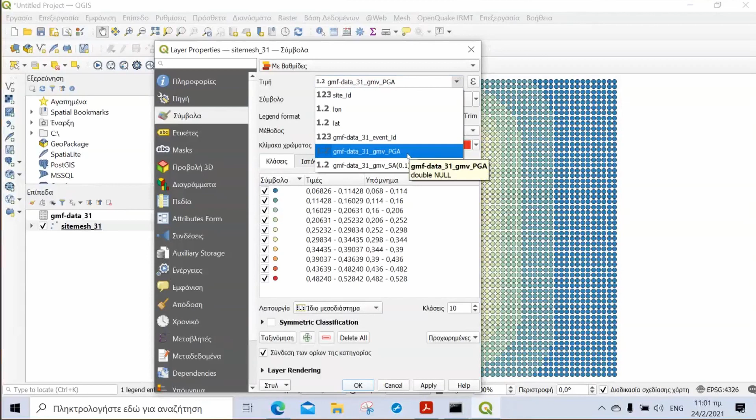Okay, well, I don't know exactly what is happening now, but if you follow the steps again and it still doesn't work, please send me an email in order to find what is happening. Okay, I'm so sorry, I really have to go.